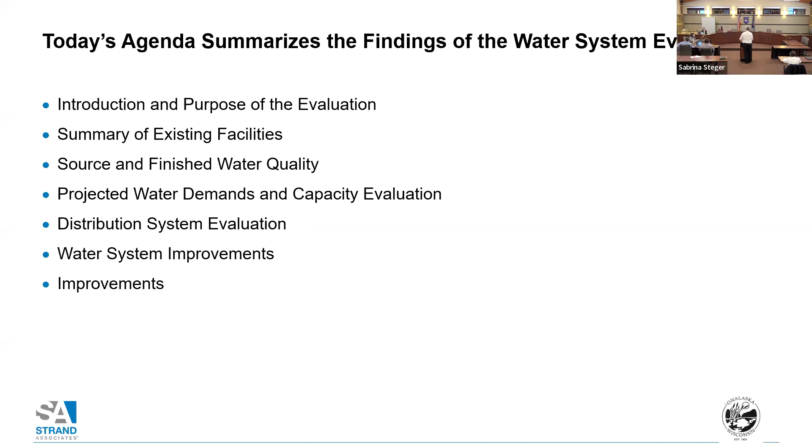One more, thank you. So just a quick summary of what I'm going to cover: first, the introduction and purpose of the evaluation, which Jared already touched on. Then a summary of existing facilities, a general summary of source and finished water quality, a discussion of projected water demands and evaluation of existing capacity, results from the distribution system evaluation, and a discussion of improvements from the study.

So basically the water study involves looking at your existing system, doing an inventory of it, looking at the water quality, reviewing the historic water use and projecting where that's going in the future, using that information to determine existing supply and capacity of storage and wells, and looking at a water distribution model. Then we develop a plan for future capital improvements for the system.

The other thing happening is the DNR Administrative Rule NR 854 regarding water system planning. It's in its final stages of rule review right now. It's basically going to require that any water utility serving more than 10,000 people ultimately do a water system plan on a regular basis. It doesn't need to be submitted, just on file in your offices. This planning study started before that occurred, but covers probably 95% of what's required by that plan. Other than a few minor things that can be added as an appendix, you'll basically meet those requirements.

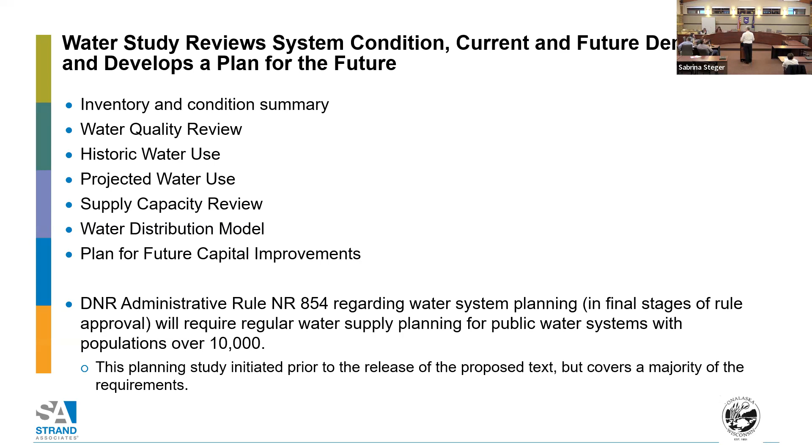Thank you. Just a quick summary of what you have for your water system - it's a very valuable asset. I'm hoping many of you have an idea what's out there, but I'll review it quickly. You have 111 miles of water main, ranging in size from 2 inch to 16 inch diameter. You have 4 wells, with a total combined capacity of 12.5 million gallons per day.

Later, we'll talk about firm capacity. Basically, firm capacity just means what happens when your biggest well's out of service. We size for that because when wells go down, they go down for extended periods of time. You want to make sure you have at least that capacity, and that's pretty much the guideline most people follow for meeting supply. So firm capacity just means your biggest well's out and you have almost 9 million gallons per day of available service.

Their system is broken up into 5 pressure zones. The main zone encompasses the majority of the city. Then you have 4 individual high pressure zones, which, well, they say high pressure, that doesn't mean that the pressure is higher there. That just means it's higher in elevation, and it can't be served from the existing zone. Then you have 4 booster stations that serve those 4 additional zones with a total capacity of 7,500 gallons a minute between all of them, not just for one zone. As far as storage goes, you have 6 ground storage tanks, 4 that are directly served from the main zone, 2 that serve 2 of the high pressure zones, and a total of 3.4 million gallons of storage.

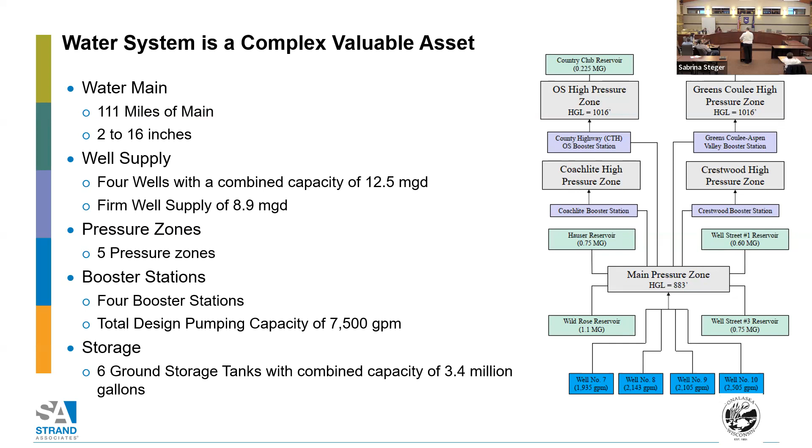In general, from review of the facilities, the well houses and booster stations are generally in excellent condition. Water utility staff should be commended. As engineers, we get to go into a lot of facilities and they are well maintained. They're very clean, obviously maintained. Usually if people are maintaining paint, they're maintaining everything else. We didn't really see anything that caused us any concern when we went through those facilities.

The wells are rehabilitated on a regular schedule. If you look at this chart, it's basically showing capacity metrics. You see that the specific capacity, which is a measure of how much water you produce for every foot of drawdown on the well, you'd like that number to stay the same. If you look, all your numbers are at or above the original capacity of the well. So you're doing a good job of maintaining it. It's money well spent that occurs on a regular basis.

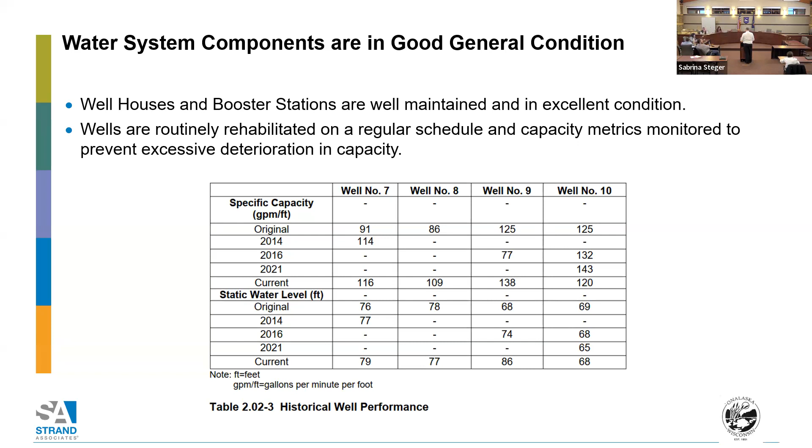The other thing to look at is the static water level, and static water levels more measure what your local aquifer is providing. If you see that start dropping, it means you're overtaxing the aquifer or you had some really dry years. But in general, as long as you're seeing steady numbers like you see here, it means you've got a good source of water and you're not overstressing it.

So that was talking about supply. This is talking about storage. Your reservoirs are inspected and are in good condition. By code, they're required to be inspected every 5 years. The next ones are up in 2026 and then in 2028, just summarizing when they need to be done.

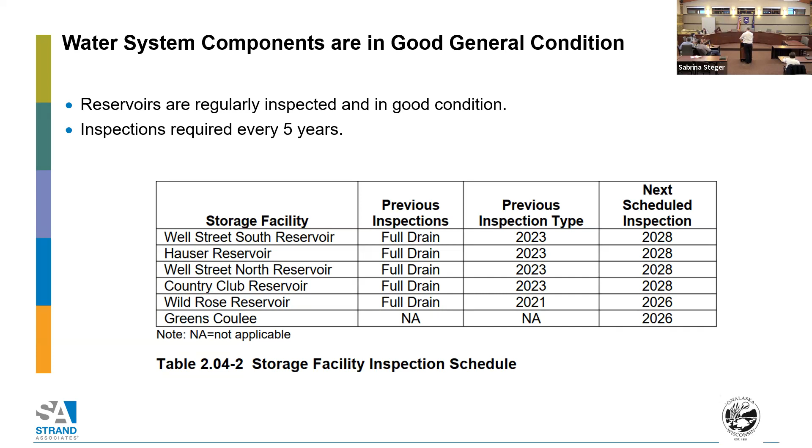Looking at water quality, this chart is presenting the general water quality characteristics of the water. Not all of these are regulatory items, but they generally tell you what your water's like. The City of Onalaska water is very hard. It's got a lot of dissolved solids in it. Slightly elevated chlorides. I wouldn't say they're a problem yet, but this is pretty typical for shallow wells in Wisconsin. This is about what you'd expect. The only way to address hardness is to soften, and generally that's only done at a few places. Most people do that internally to their house for softening.

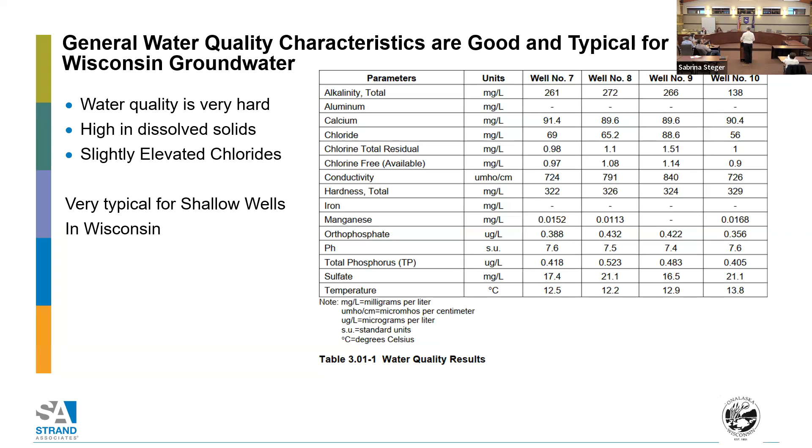There are future regulatory and water quality items to keep an eye on. One thing of note: you did have some volatile organic compounds detected in the water, but these were at very low levels. Most of them were actually below the level that they could quantify well. They were detected, but below the level they could give you a firm number on. So that's a good sign. They're basically 2 orders of magnitude below what the MCLs are, so don't anticipate them being an issue. But it's something that would be monitored over time with normal regulatory sampling to make sure they don't start creeping up.

I think everyone's heard of PFAS as far as contamination goes. Right now there's a state level for PFAS, but the EPA is in the process of creating the rules for what the levels are going to be, and they're talking about 4 parts per trillion, nanograms per liter. The other thing they look at is the hazard index, which basically takes a series of different PFAS chemicals, divides them by numbers, and as long as you stay below 1, you're okay.

You do have presence of PFAS in 3 of the wells. They're about a quarter to a tenth the level of the proposed rule as far as MCLs go. So there's potential there. It probably means that when you get to the point of sampling, you won't just do one or the first set and be done. You'll probably be asked to do additional sampling as the rules get fully implemented. But again, the rule is not necessarily finalized yet, and for all intents and purposes, this is probably what it's going to be. You're still in good condition, but it's something that needs to be kept an eye on over time.

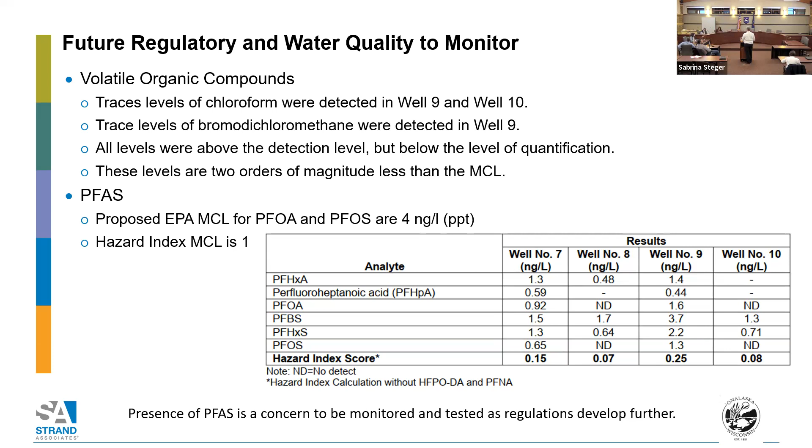In general, past DOA estimates projecting out into the future were optimistically high. Their current estimates for population are well below that. So we worked with Jared and came up with more realistic numbers for growth, and used those to project future populations. We're looking at a population of about 22,500 out in 2040, and that's what we based our calculations and projections upon.

So how we do that: we basically look at the sales data you provide to the Public Service Commission, then look at how much we anticipate sales to increase. Historical data shows the average person uses 99 gallons per day in Onalaska. You take that total sales and divide that by the percentage that's pumped from the ground versus what's delivered to the consumer, which is about 0.89 - meaning about 89% of the water pumped from the ground actually gets metered as sales.

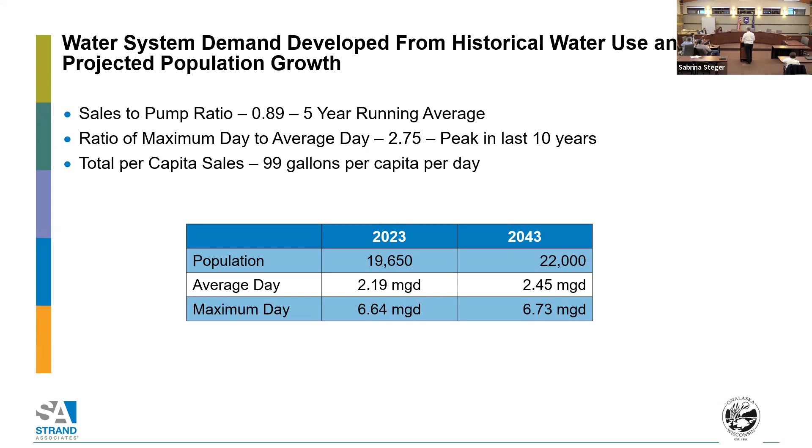So ultimately, when you run through all that, we're looking at average days out in 2043 being almost 2.5 million gallons per day, and maximum days being on the order of 6.73 million gallons per day as projected pumpage. This is the same charts we looked at earlier, but now you're seeing where the maximum day projections go relative to the historical information.

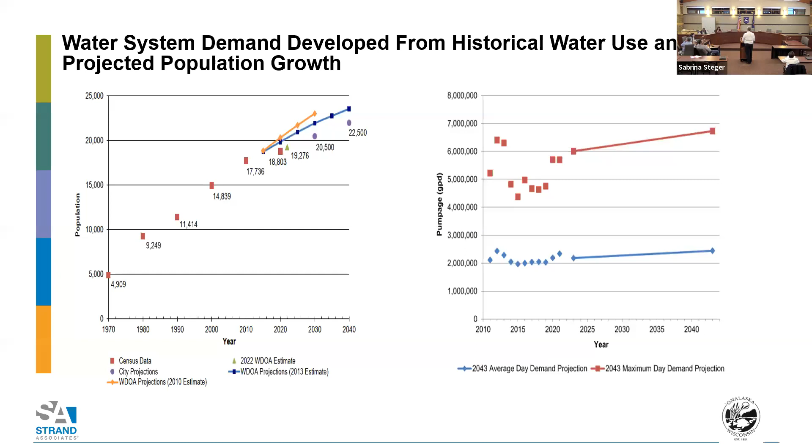Using the projections we came up with, we then compare that to the firm capacity to verify that you have enough capacity in your well supply to meet it, and that there's enough storage capacity. Firm capacity means your largest well is out of service. We do a calculation based upon availability for fire flow and use for domestic peaking to calculate reserve storage capacity. Even with our projected demands out in 2043, we're looking at almost 2 million gallons of reserve storage capacity, in addition to the 2.2 million gallons per day of pumping capacity.

So basically you have about 75% of your average well as reserve capacity right now. And so you're in pretty good shape - very good shape actually - for future demands.

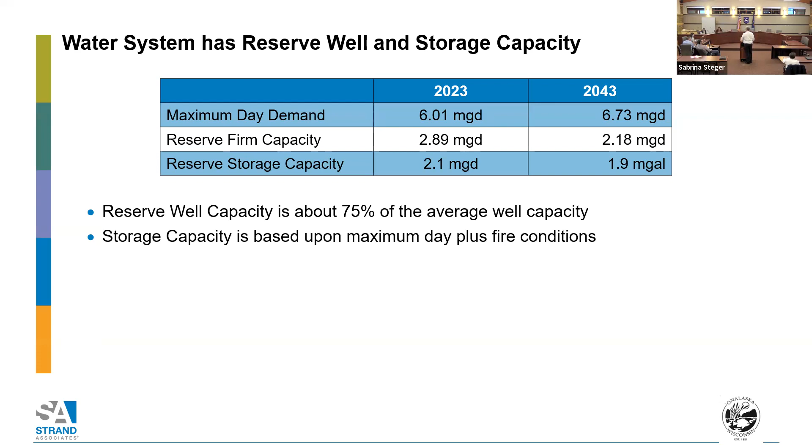I'm not going to go too deep into what we did with the water model, but basically we reconstructed, calibrated, and operated it to evaluate the system. The model tells us how well we can move water throughout the system, from the wells to the storage to the consumer - where the pressures are, what the available fire flow looks like. So we run average days, maximum days, peak hours, and fire flows just to see where there might be weaknesses in the system that need to be addressed.

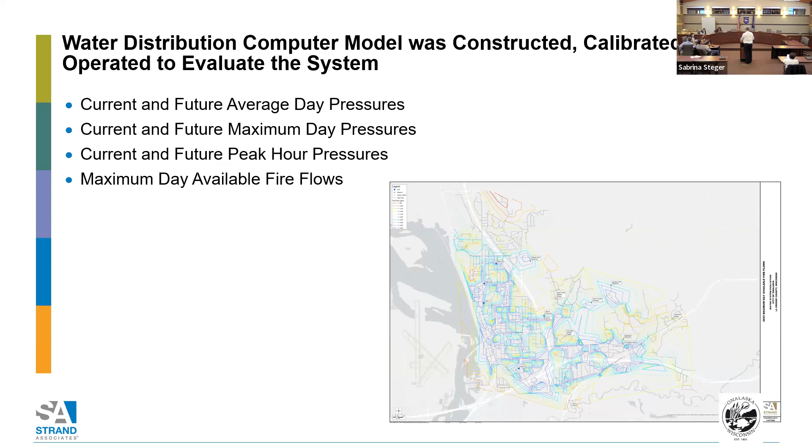There's more detailed mapping of the results in the actual report that was delivered, but it helped us define what future projects might look like. So I'm going to go into a series of slides covering the recommendations and costs for future improvements and maintenance. What we're seeing from a historical perspective is about every 5-year intervals on the wells for well rehabilitation.

This is the actual borehole itself, it's not the pump. On average, you're spending approximately $40,000 per well when you do this. You've seen payback in the past in that you're maintaining the capacity, you're not losing it.

The routine well pump inspections, basically that's where the well pump's pulled out, refreshed, bowls are worked on, motors, etc. On average, we're seeing that about $70,000 per pulling, and that's happening about every 10 years.

Then the other item that may be out there on the well supply is the potential need for separating the phosphate feed from the remainder of the storage and the other chemicals. This may be required by the DNR. It's not necessarily going to be required immediately, it's something that may come in the future. And because the stations are set up all a little differently, each one has a slightly different cost associated with what it would take to implement.

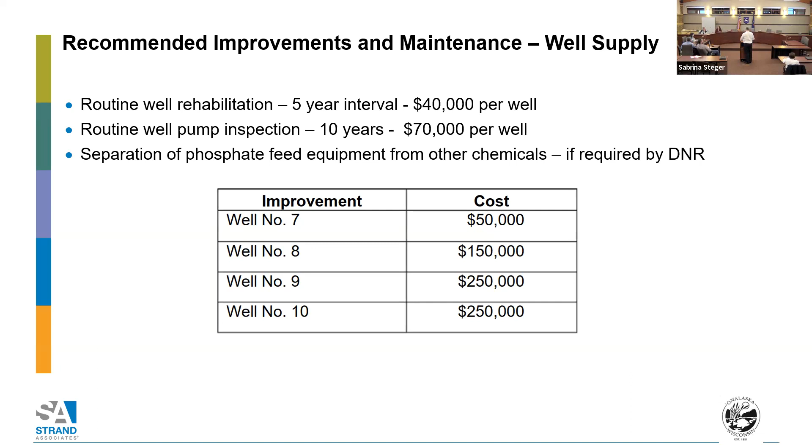As far as storage requirements, which is the next one, the report's calling for a Crestwood pressure zone reservoir. That's going to be triggered based upon growth and development in that area. Basically, that zone currently is only served by a booster station, and as that grows, once you go over a certain threshold, you're required to provide storage. This provides ground level storage similar to what your existing ones are in your other high pressure zones. I believe the number we were using was 150 to 200,000 gallons to place that reservoir.

And then we're covering just the miscellaneous costs, which include the reservoir inspections that occur on a 5-year interval. And then two other things that would be at the Well Street Reservoir, which showed more in the modeling, is that it's very difficult to fill the Wild Rose Reservoir, which is out beyond it, so wells want to fill the nearest reservoirs. The idea is adding altitude valves so you can close off the reservoir so it stops filling it when it gets full, and you can push it out to the next reservoir basically. There's a different number on the two because they're different size lines that go in.

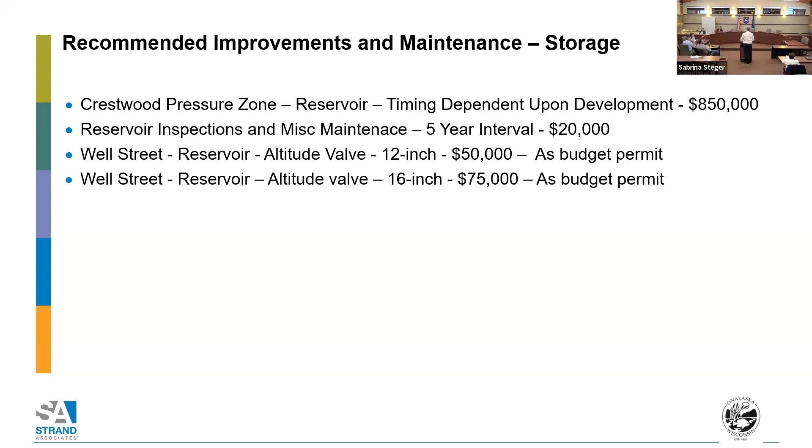So when we looked at water main improvements, we looked at existing projects that are kind of already on the books, like the Main Street project, which we're showing here. This is just being coordinated along with some utility work, along with the proposed expected cost.

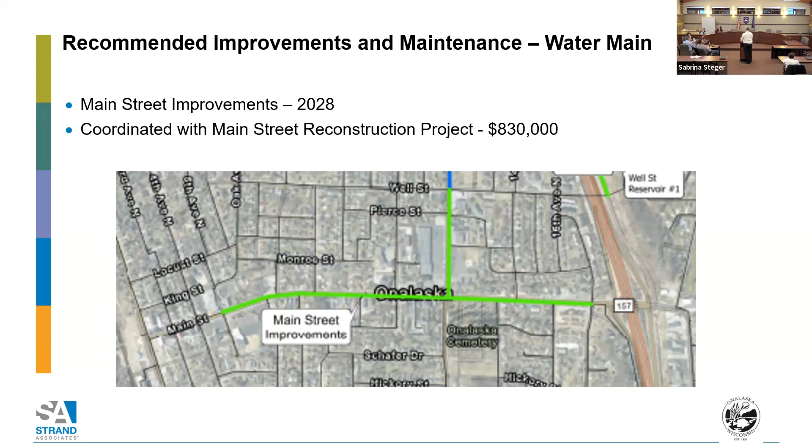We can keep moving. I'm not going to go too deep into any of these water main type projects, just because many are the same and many are driven more by potential growth, potential changes in how the system may operate, not so much on a strong need that was revealed from the study.

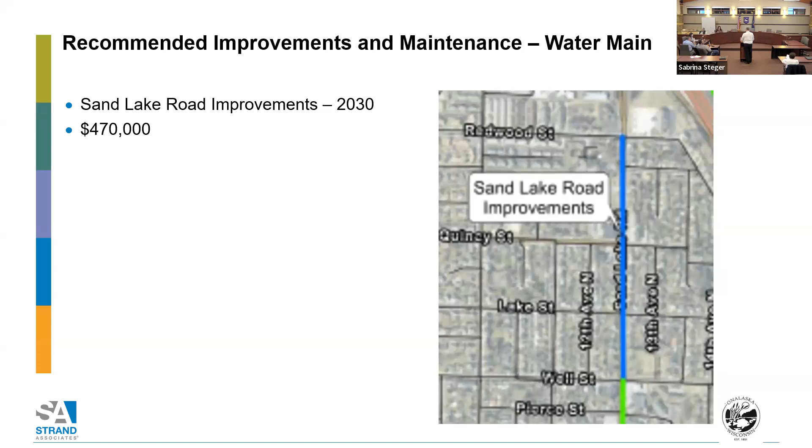Then there was the Cedar Creek Lane. Again, this one was driven by the need for expansion, and how to get water out to that system or that area.

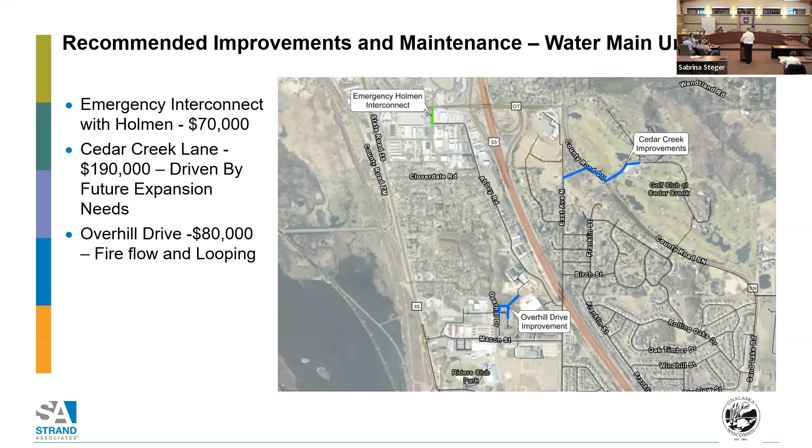And then Overhill Drive was an area that showed a need for looping. There was some dead ends, some lower fire flows in that area, and this was basically suggested to address that. It's a relatively minor improvement to make that occur.

The next one was then extending water along Sand Lake Road, Highway 53 loop. This would again be driven more by development along that route. It also helps with north-south connectivity, although it doesn't take away all the hydraulic concerns you have going north to south, but it's more driven by that. It gets a little pricey because we are connecting, and part of the connections have to be done directionally drilled, given where these things are going to go, in order to help move some of that water from north to south.

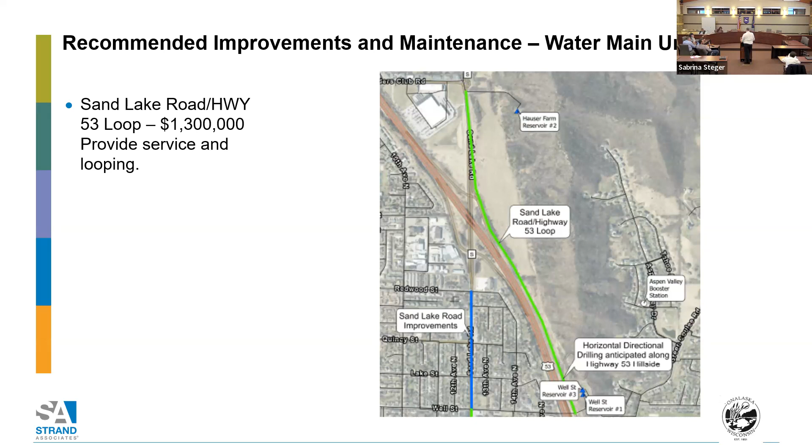Typically, fire departments like to see somewhere between 1,000 and 1,500. This is just an improvement that could go along with that. This isn't a 'do this tomorrow' thing. It's that when we're redoing the street, we should do this, or if we've got another project going that way, we should do it then.

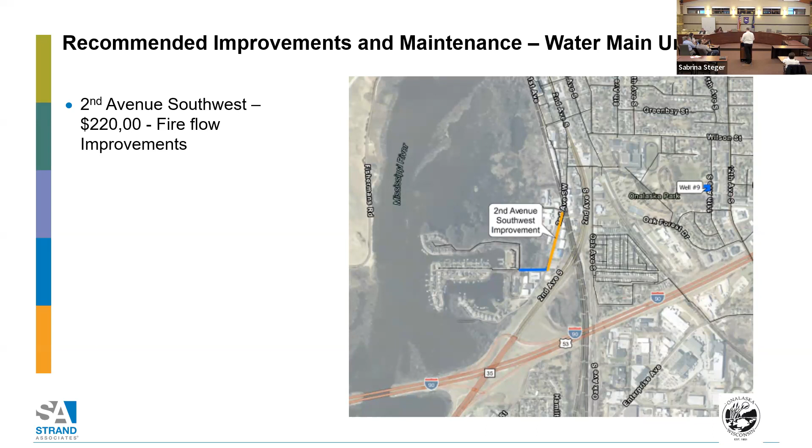And then the final listing of projects here, we're looking at places where looping needed to be done. The first one is, if there was an area currently in the township that happened to come into the system, that's why you'd bring that Green Coulee/OS loop back through. It benefits everyone in that it closes the loop and helps move water, but it would primarily only occur if that area wanted to come in.

The French Road Emerald Drive loop is a really short connection that we thought looked like it should be in there. It's literally about a couple hundred feet, and it just happens to be in an area that closes up a loop.

The Crestwood extension basically extends water to a proposed area—sorry, I was looking at it wrong—it's basically closing a loop on a long dead end.

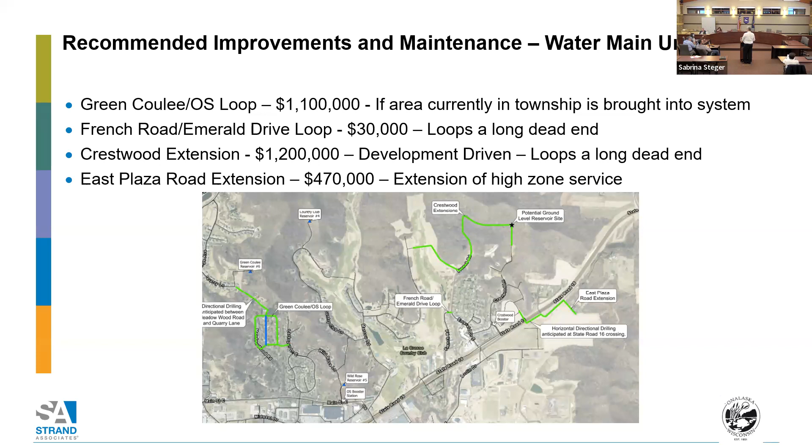And then the East Plaza Road extension is for an area where someone is looking to develop, kind of northeast of Highway 16, which would require a directional bore under 16 to get through and bring water up into that area.

I guess the summary and takeaway is the system is really in pretty good condition. It's very good condition, well maintained overall. The record keeping is really good—when we asked for stuff, it came really fast. Not every community is that good, so it's a positive for you all.

You've made good investment in the system. Part of the reason why you have reserve well capacity is you installed that iron and manganese treatment at well 9. It made it so you could run that well more frequently and not worry about water quality, and that really has helped you. Yes, it was an investment, but I think it's paying off for you in the long run.

You've dealt with lead and copper issues—these were things identified in the last report. The phosphate addition has helped with it, and well maintenance has helped too, since that seemed to be a contributing factor. The well rehabilitation, maintaining that capacity, is important.

The dollars seem like a lot when you look at it, but if you had to re-drill the well itself, you'd spend $250,000 to $300,000 at a minimum to replace it, not including the well house and other facilities that go with it. So the maintenance is an important thing, and you're doing a good job staying on top of that.

Big picture, you have reserve well capacity and reserve storage capacity that meet the projected needs we're looking for, as well as capacity for unanticipated growth or expansion of the system. If someone approaches you about delivering water, there is reserve capacity there. That's, I think, the other main takeaway from what we saw.

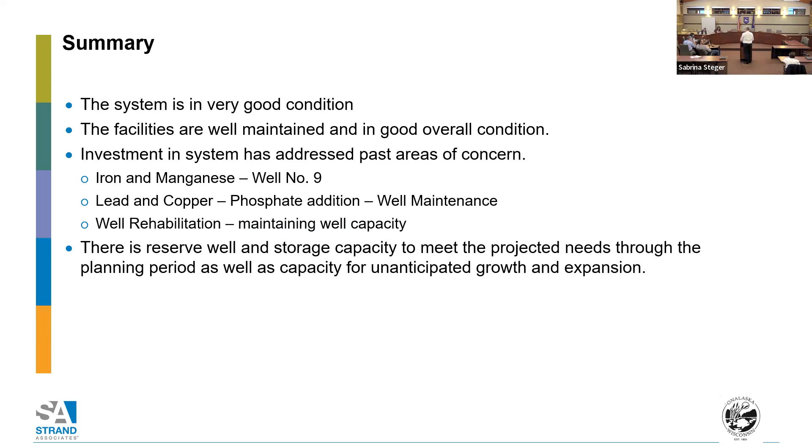At that point, I would throw it open to people to grill me with questions if they would like.

Mayor, do you have any questions? I do not have any questions. Thank you for asking. Anyone else? All right, thank you very much.

Okay, very detailed, appreciate it. Thank you, Andy. And thank you to Public Works for maintaining our wells well. Wells well, I guess. Hmm. All right.

All right, so moving on to item number 5, which is the purchase of geographic information system software. I believe it looks like that's for 85.2K.

Jared: Yes, in your packet tonight I have included a proposal for a 3-year agreement from Esri, our provider of GIS software, for the small system software municipal agreement. We looked at this and compared it to our à la carte costs, and found that à la carte would be slightly more than the agreement if we utilize it, and the agreement would also offer more options in software licensing, flexibility, and usage.

We actually get more right now. Every person in the Public Works Department has a field operator license that we pay $350 a year for each iPad. So all 22 iPads in the Public Works Department cost $350 a year just in licensing. So with that, we're licensing 22 of them.